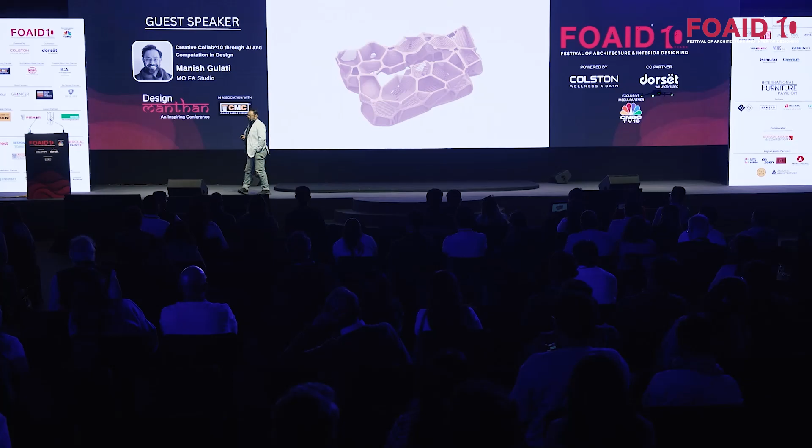For us, design is more deep-rooted than just what your intent is. In a lot of these cases, we don't know what our intent is.

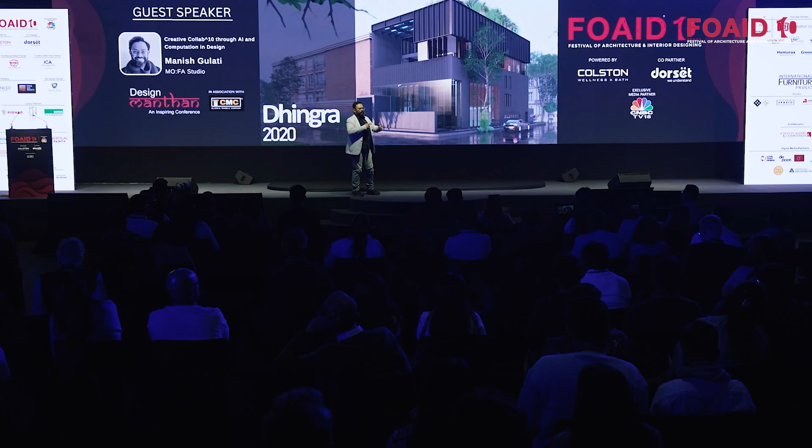I had a thought to start off by saying there was a time when we used to use CAD, then BIM. I'm going to go in reverse with this, looking at what we are doing today versus what we have done in the last 20 years. So it's a sort of reverse chronology of the same thing.

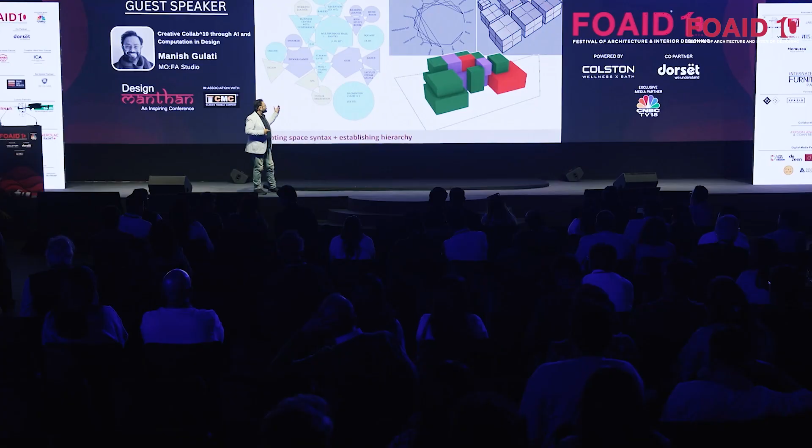How one function is connected to the other function, and how these parent-child relationships work. How one function is important and connected to another, and that sort of gives us this interrelationship diagram.

I invite Manish Gulati, the founding partner of MO:FA Studio.

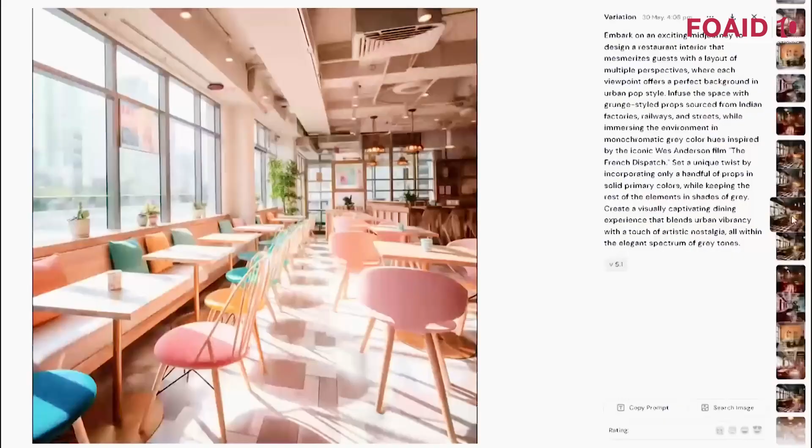So yes, those 3,000 images were generated in 12.5 minutes on Midjourney.

Today I'm here to not talk about the projects. I'm from this firm called MO:FA Studio. We've been around for 20 years now.

And this is what I'm here to talk about. More than just doing the projects, it's about this factor: the known and the unknown. In most design projects, it's always the known factor with the architect's mind. It's one person, a team, collaboration. You have an idea, you already know what you're going to build. And from there on, you know the results. You have a sketch, a line, and from there you start building and resolving it.

Our whole journey in the last few years has been working with designs where we don't know anything. That's where words like inclusiveness, democratization of the design process, and using machines come in. It's like having people on your team, but for us, even the machines are as important, where we are feeding in the data and using simulations.

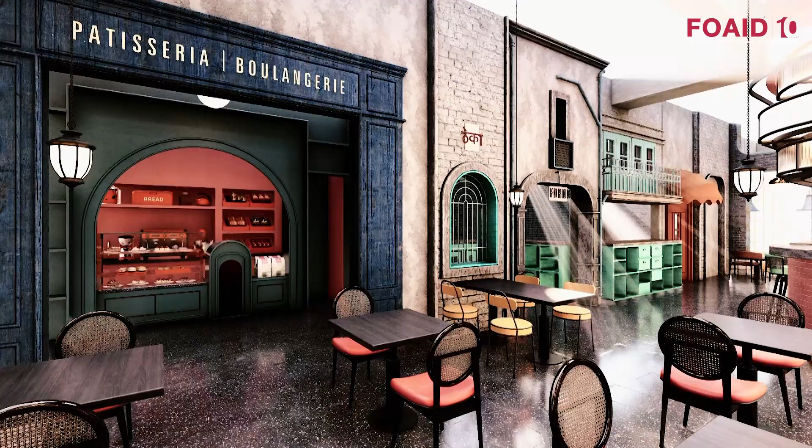Most of these results ended up talking about the color schemes, the perfect colors of Wes Anderson, and this surrealistic combination of Paris and Delhi. These images started to appear with various prompts, and they became the inspiration for us to work out the interior space, and various colors and textures, a perfect combination of what AI could do with you.

Going further, that's just a space coming up.

We're working on another project, a 3D printed clubhouse. It's a public building we're doing in Bangalore, one of the first 3D printed buildings in the country, where we used three factors. We used AI to visualize the spaces for us. At the same time, we have not drawn a single line or a plan.

What we've done instead is develop these visuals simultaneously while the design is being developed. So there's no plan, no line, no sort of intent that has been drawn.

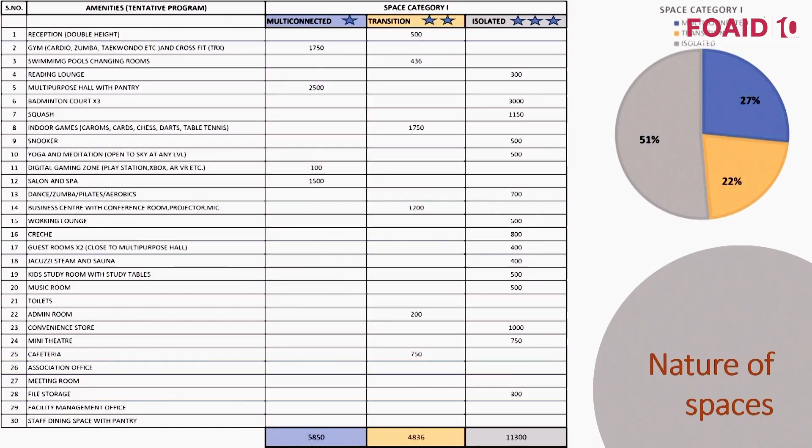What we call generative design: we've taken the area and fed it into a plugin called Termite Nest. It's a simple relationship of a parent and a child relationship.

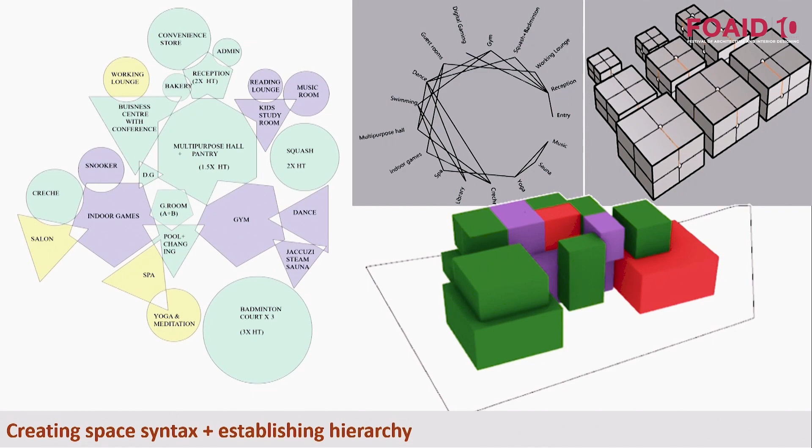How one function is connected to the other, and how these parent-child relationships work, how one function is important and connected to another, gives us this interrelationship diagram.

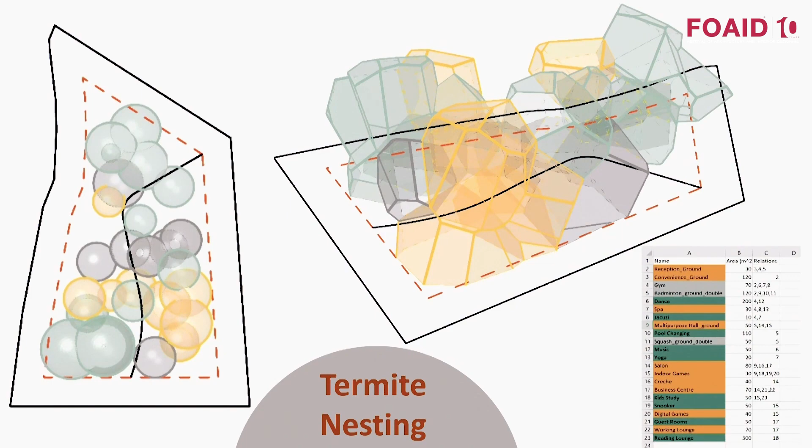What we've done is fed that into Excel, and using termite nesting, every time the data changes on the Excel sheet, the configuration of the building changes. This is a sort of iteration we've been working with as it comes together.

And the third part of this is that this project is going to be 3D printed, coming together in the form of layers.

For us, design is more deep-rooted than just what your intent is. We don't know, in a lot of these cases, what our intent is.

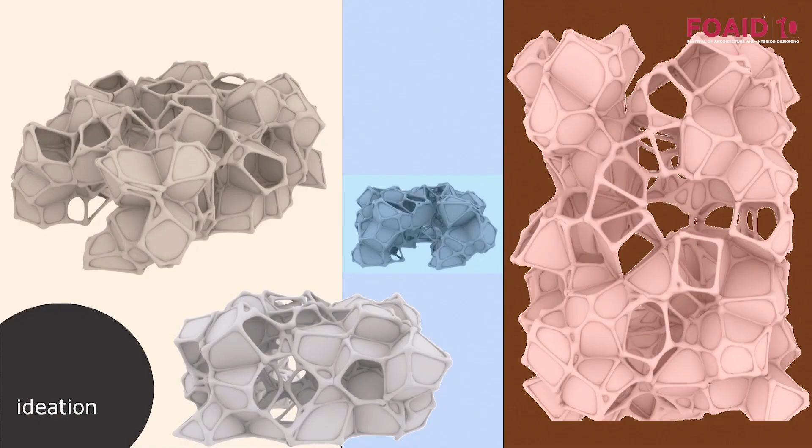And I'm a lover of technology. I'm somebody who's grown up with technology. This is the space which is coming up. And this whole presentation is going in reverse.

I had a thought first to start off with saying that there was a time when we used to use CAD, we used to use BIM. But I'm going to go in reverse with this entire thing, showing what we are doing today versus what we have done in the last 20 years. So it's a sort of reverse chronology of the same thing.

A residence that we started during COVID, a completely emergent design. The client had a very simple brief. They wanted to create a very large subterranean space, a basement which would receive a lot of natural sunlight, enough so that we could grow an entire garden or trees inside it.

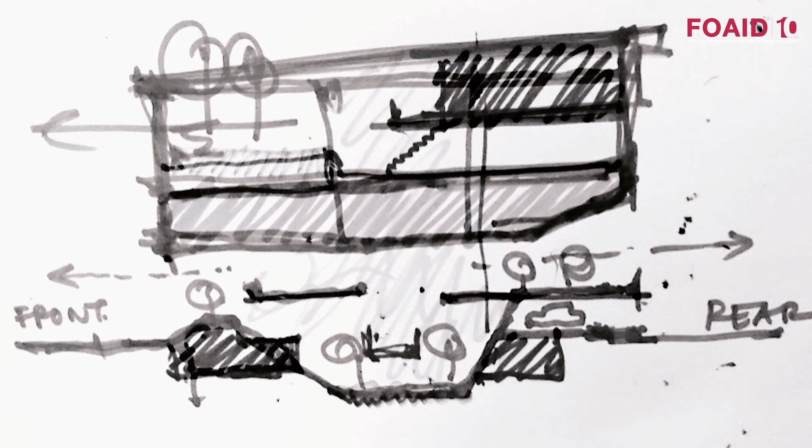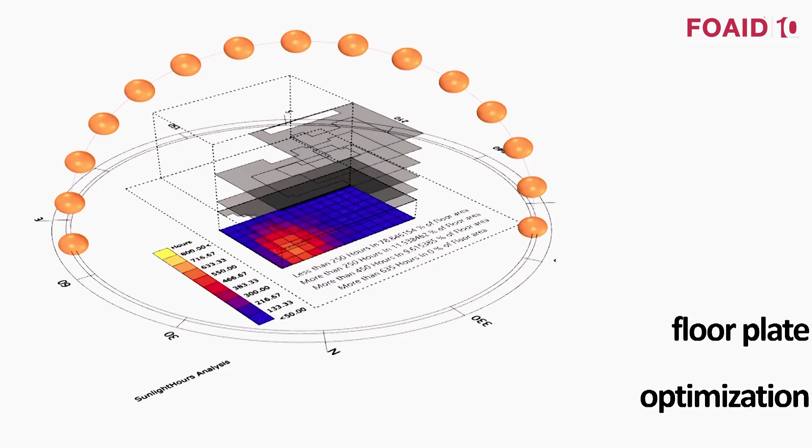Rather than going with a standard way of drawing a plan, we fed that data into an algorithm, and we got more than 27,000 iterations within 12 hours. These 27,000 iterations were then refed into the computer with the functional layouts. And what we got was multiple floor plates, multiple floor plans, each one adhering to one condition, that the basement would achieve more than 60 to 70% of natural sunlight.

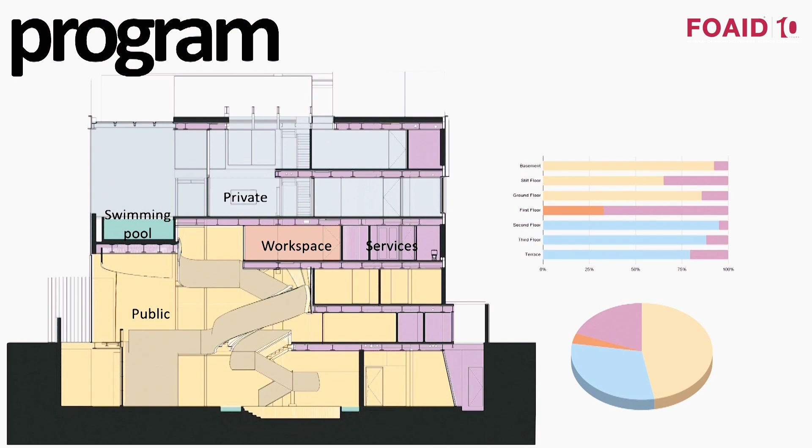Based on this, the plan sort of started emerging, and we got a section where you see a reverse section. The basement and the lower floors are almost 40 to 50 feet high, whereas the house sort of becomes more dense as you go up.

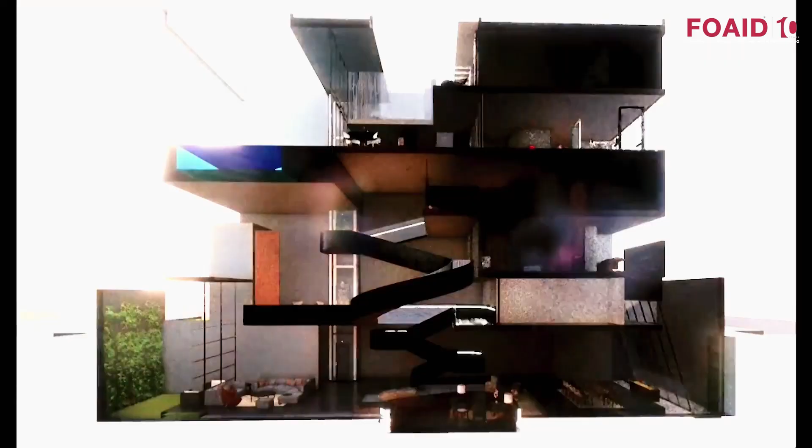That's a sunlight study to understand, and even today, when I stand there, we did the simulation of the predictions of a particular date and particular time in a particular season. The sun shadows, the sunlight, and the lux levels were exactly how we simulated them.

Another project of the emergent design where we did a small installation, no plans were made. We wanted to create a landscape using shipping pallets. And here, rather than coming up with an idea of how this whole installation would be, we just had an Excel sheet of XY coordinates.

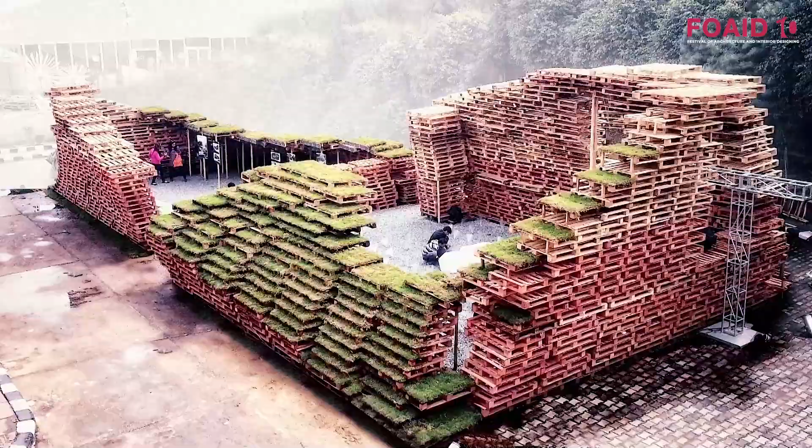Those XY coordinates were used to just stack these pallets to create these hillocks, which are more of the nostalgic memories of my childhood, going to the ruins in Delhi, to Lodi Gardens, where you got these sort of ruins with grass growing over it, and as kids, you go up, you have your Sunday picnics.

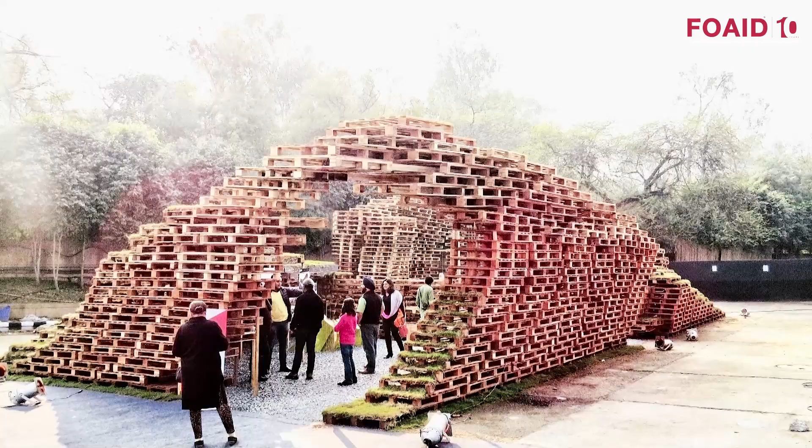So this was more to kind of understand and come up with something where you're not using the standard way of making a drawing or making a model or doing anything.

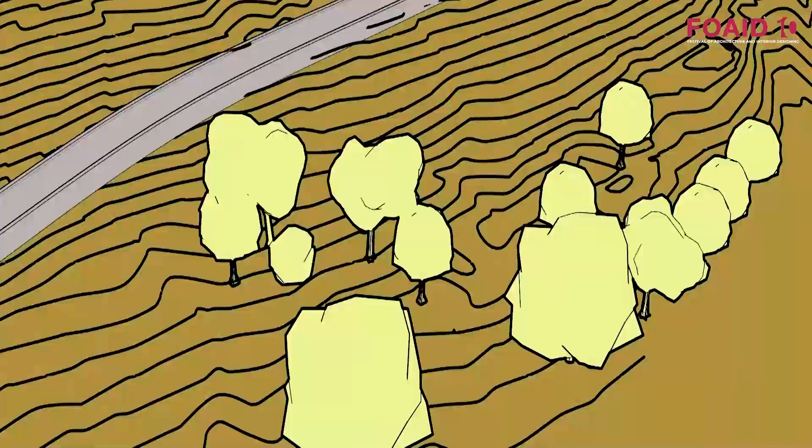It's one of the largest projects that we did, again using a similar kind of approach, where there's an existing contour, and we did the terrain mapping for that contour so that the natural water flow doesn't stop. We divided the entire contour into a grid of cubes, and these cubes, wherever they appeared on whichever part of the land, this takes us back to the villages in Himachal, where every house is sitting on its respective contour.

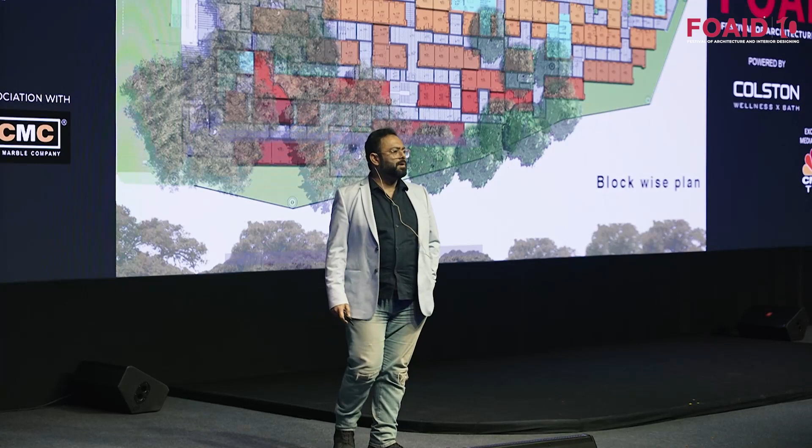Rather than leveling the land, flattening the land, we used it to our own advantage, and a plan sort of emerged from this whole technique of having an equal distribution of internal streets as well as residential spaces which moved at various levels, creating these wonderful internal streets with existing trees. We used the existing trees to our advantage, and we moved all these units within that.

I'm going to skip because there's lots to show.

Now, since this is reverse in chronology, something that we have been dabbling with for the last 15 years is CNC file-to-factory production of houses. I use the term production of architecture because over the years, 90% of our projects are not constructed using RCC on site, because we want to reduce the carbon footprint, we want to reduce the pollution, we want to reduce all of that. So most of the projects now are factory produced and brought to the site.

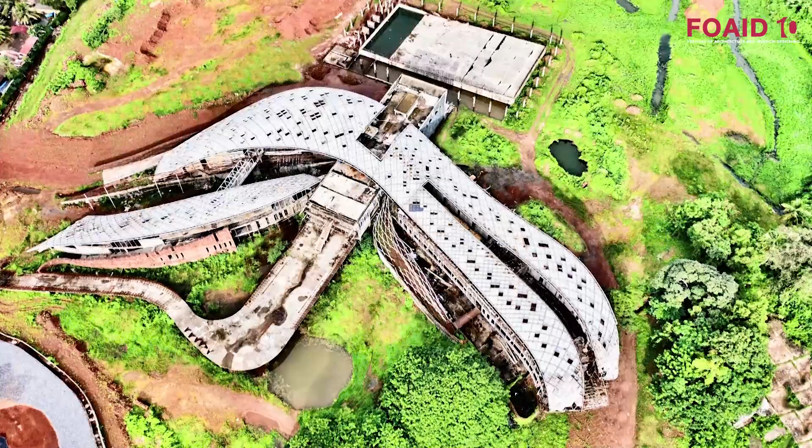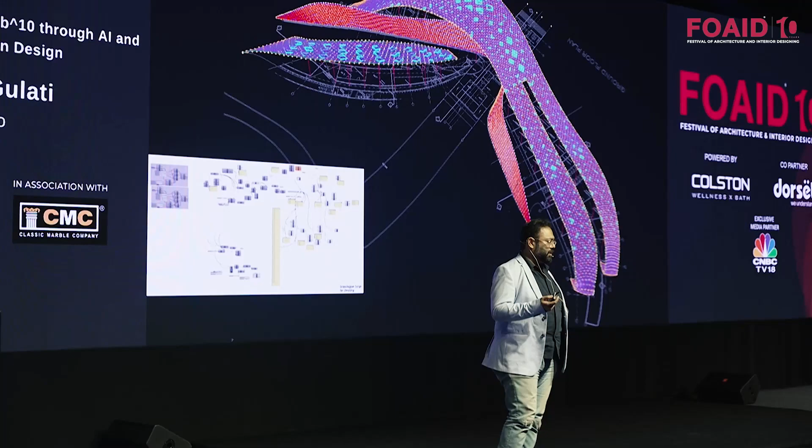One of the largest projects we've done in Goa, about 45,000 square feet of roof space, where the entire module, every part of the roof, individual modules were done using topological optimization. We use the roof in order to reduce steel. It's a government project done at L1 costs, so one of the most reasonably done projects in the country. We did the fabrication analysis.

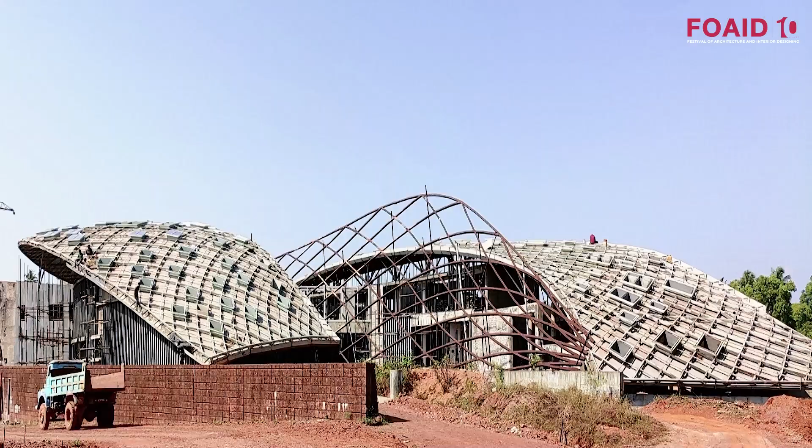We worked out the entire roof, which is a doubly curved roof inspired from the waves of the sea, in the form of how it can be manufactured in the simplest possible manner. The drawings were automated within the office. More than 5,000 drawings were done within a span of 15 days, all automated. The accurate data retrieval, down to the core, meant these pipes could be individually welded within the factories to get a roof which is within the tolerance of plus minus 3 mm.

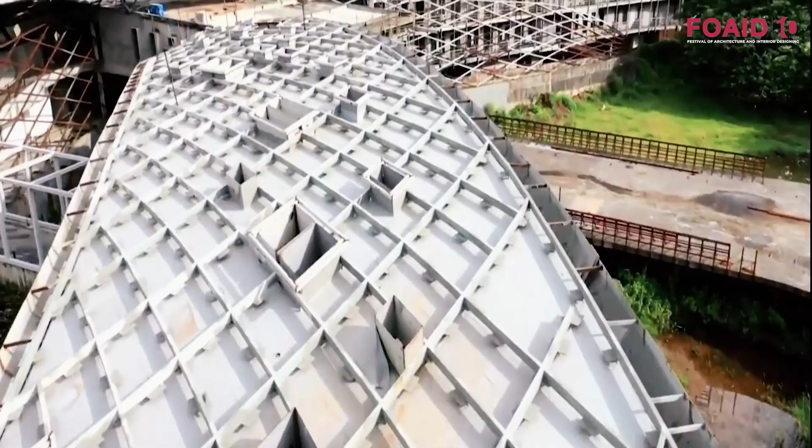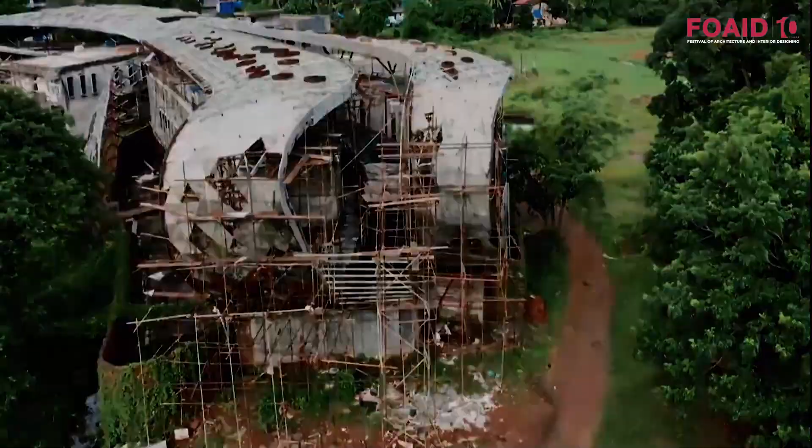A very highly accurately done roof at that scale at extremely low costs. It shows you the complexity of the roof, the skylights, where everything was pre-analyzed, pre-simulated, right from the lux levels to the rainwater flows, to the water flows and how it would react to the wind and the sunlight.

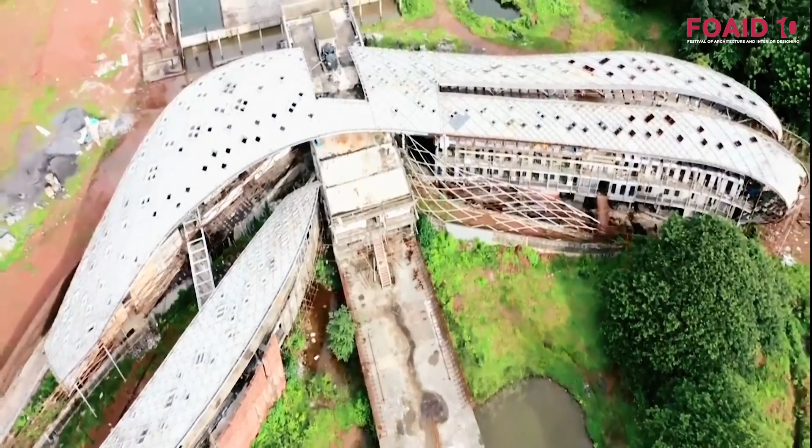The roofing material itself is one of the cheapest color-coated metal sheets, which was used using an origamic technique. We programmed the entire thing within the office as a simple cut-fold system, and all these individual roof panels mount themselves on the complex roof, thereby forming a seamless surface that represents what we were wanting to intend. That's the almost completed project.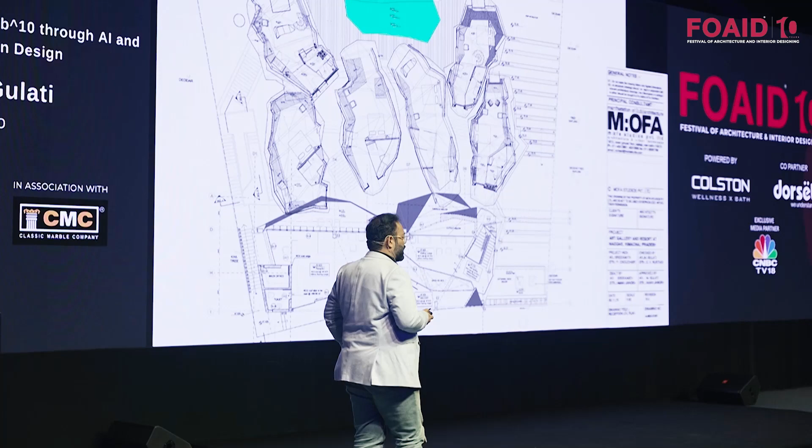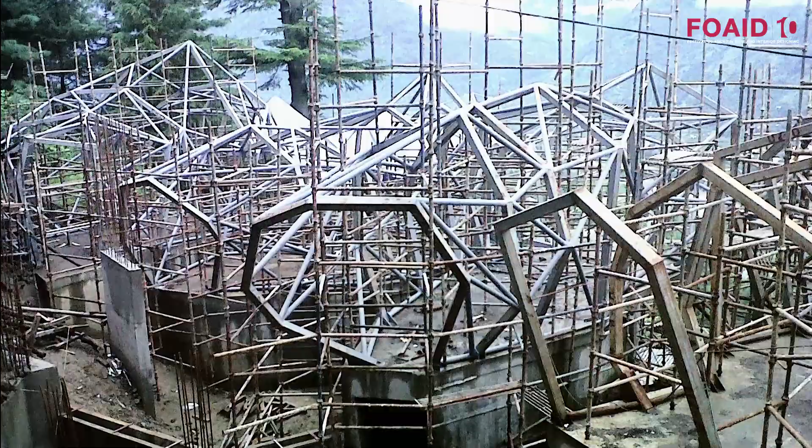Almost inspired from the anthill architecture. Each of these frames, pre-planned, pre-cut, produced in the factory, brought to the site. The site was extremely difficult to work with. It snows almost 3 months a year, and the construction time is only 6 months. So in that extreme condition, most of these frames, most of the structure was made here. And then this is the photograph of the completed project.

Some of the views of the pods, the interior spaces - the precision at which a structure like this could be made in difficult conditions of Manali was only possible by using the automated techniques of CNC and file-to-factory production.

This was the first residence we did in 2006, where we had used a similar kind of a system where the walls were not built using the traditional materials, but were made using plywood slices, covered with ferrocement, and we got a very organic shape.

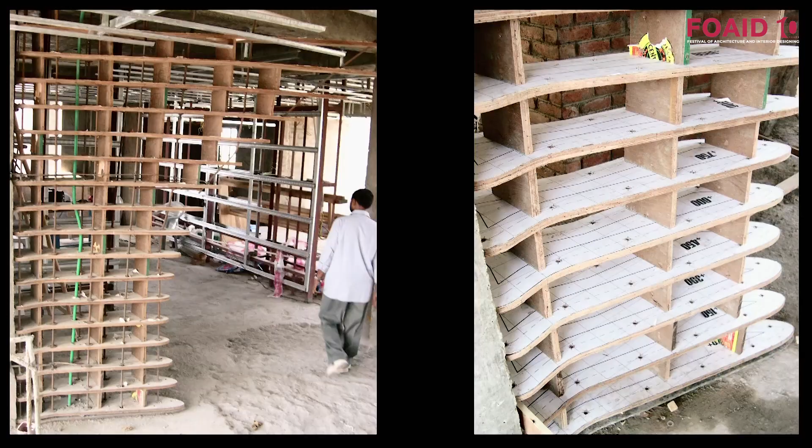So this is a very experimental project. In fact, every project of ours is an experiment. It's a study for us to understand. So the last 20 years of MOFA is more like a study in itself - we're an institution in itself to learn and understand what the next level is going to be.

Coming back to a standard factory-produced prefabricated architecture, which is something that we are pushing.

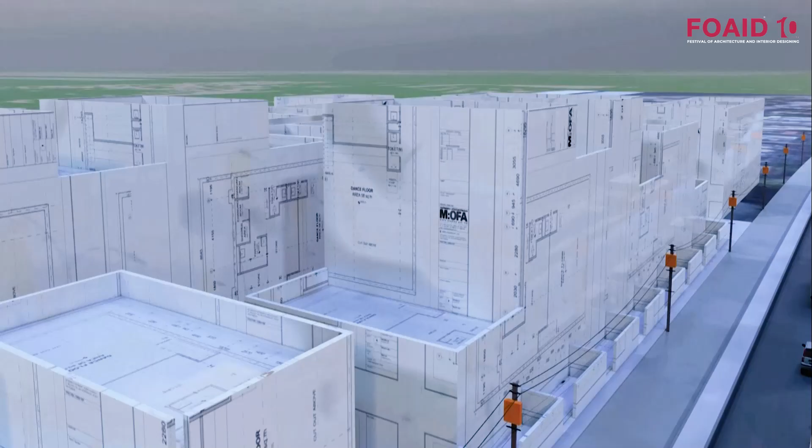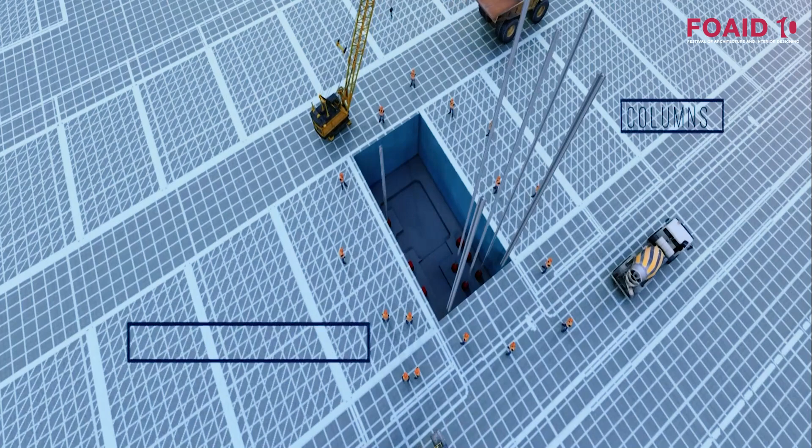A conceptual video for one of the houses that we are doing in Paschim Vihar. This was shown to the client in order for him to understand the whole construction process, where only the foundations were done on site, rest the entire structure comes like a Lego block, pieces coming from the factory assembled on site, including the precast walls.

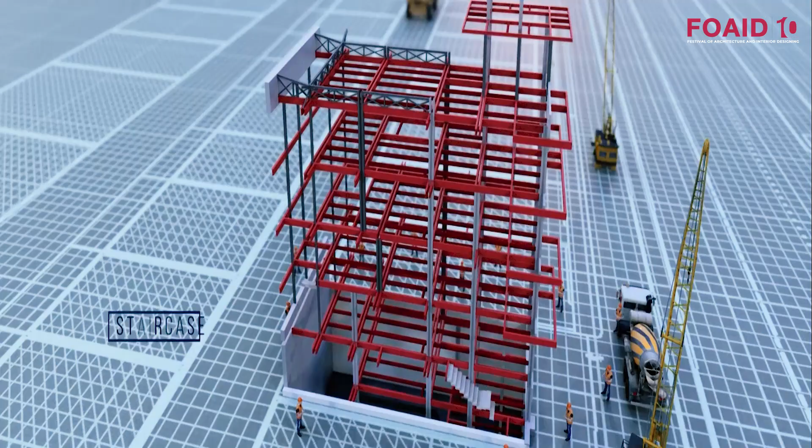So the idea for us is to look into the future, and in order to automate the process of design and construction, making it more democratic, more inclusive, we are not averse to using the machines. We love to work with the machines.

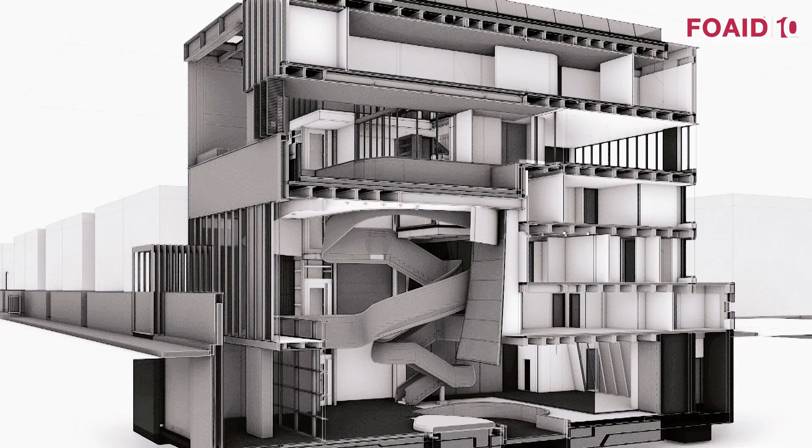Going to another house in Bangalore. The entire house is prefabricated. Even the complex forms, the complex roofs are all completely worked out and done. The immersive house that you saw in Ishwarnagar, in Delhi, is completely done in steel again.

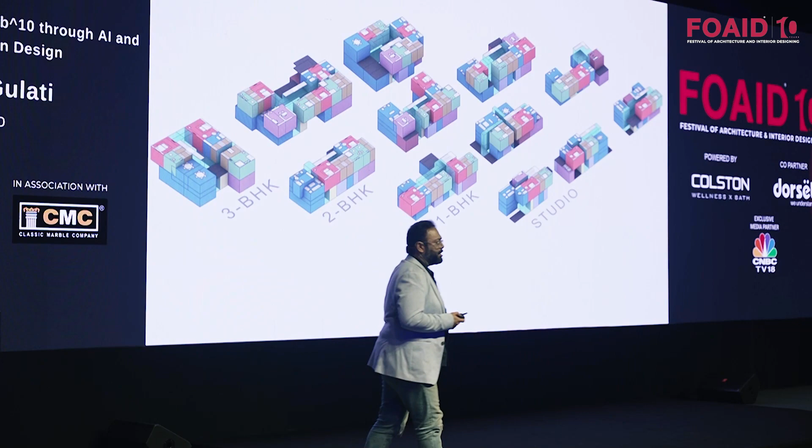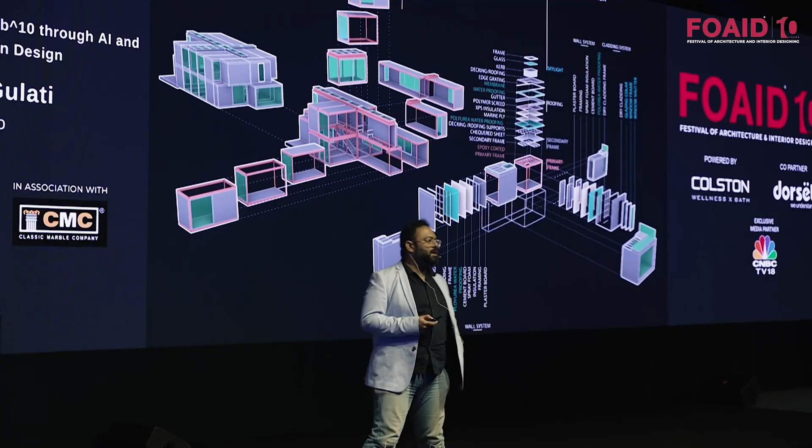Coming to the point that we have designed houses and we're marketing these houses now, where the entire unit is built into the factory, not as a kit of parts, but as modules of almost 8 feet by 40 feet. Those modules can be assembled on site in a matter of 2 to 3 months maximum. So much so that you could literally, in the future, order a house on Amazon, use the app, design it, put together, make the whole process so democratic that ultimately you do not need architects like us.

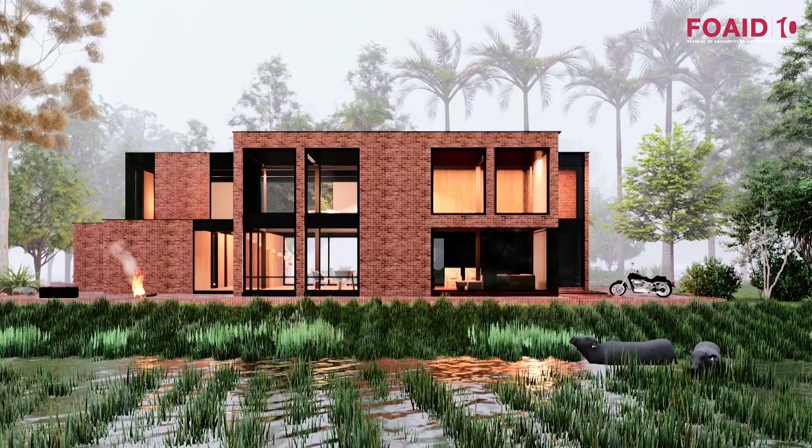That's a complete house. Another project we're doing in Goa using shipping containers.

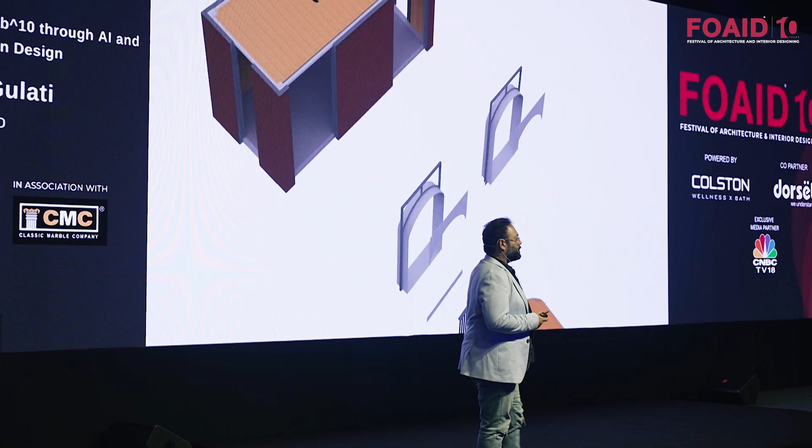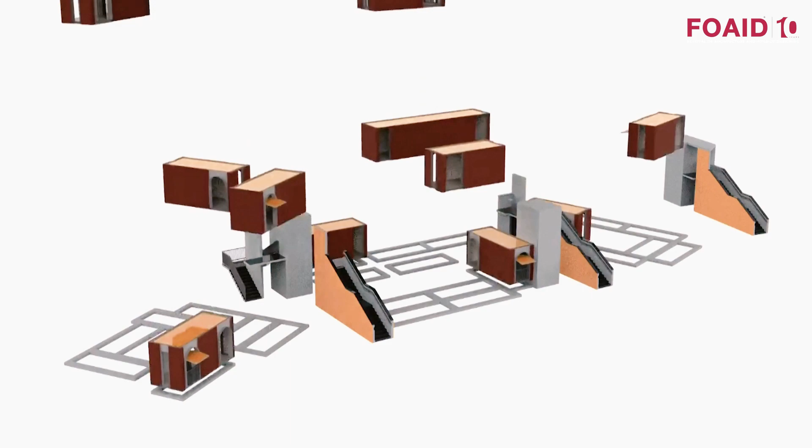We're recycling these 250 shipping containers, prefabricating them off the site, about 20 kilometers away, as a kit of parts where every window, every railing has been turned into an inventory, and that inventory is pre-worked out with various modules which come together on a site in Goa, reducing the carbon footprint and the pressure on the land by 90%. Lightweight foundations, and everything above that is factory produced. So much so that tomorrow, if they decide to remove the project, the land is completely free and given back to its original shape the way it was.

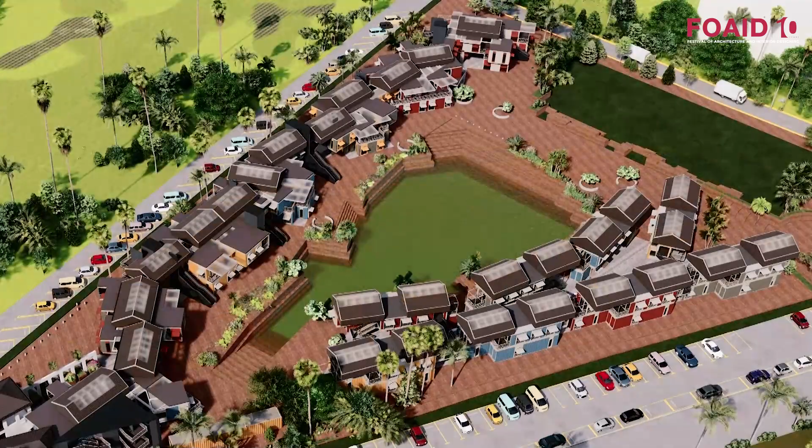That's the view of the Goa Bazaar, or Goa Haat, which is a crafts bazaar in Goa, designed completely using shipping containers and prefabricated elements.

This brings me to a point — apart from building the architecture or the physical look, a lot of times I've been questioned that it's a very form-based thing. Is parametric design only form-based? No, it's not. Parametricism means using parameters to simulate certain variables to get an intended result.

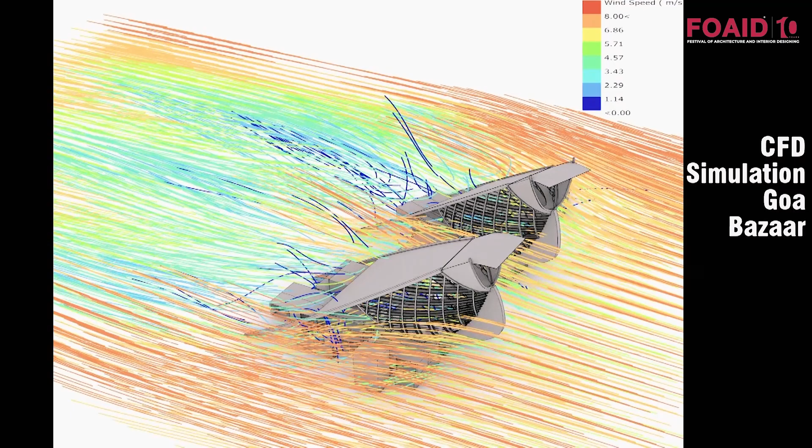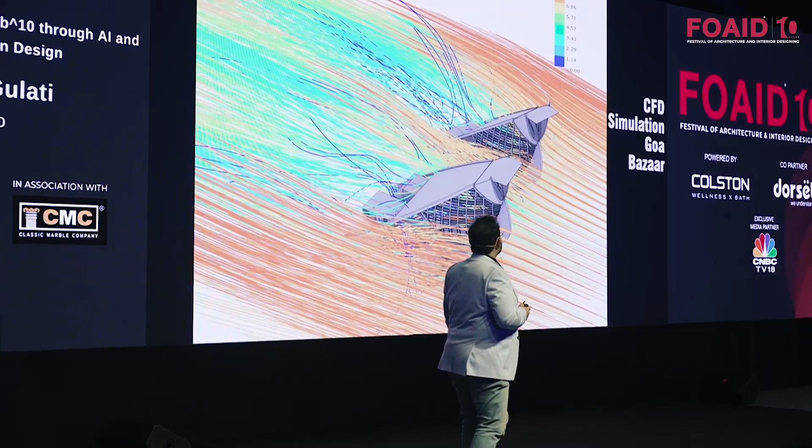So here we use data which is seamlessly available — cloud computing, a word very commonly used in finance markets and various places to do predictions. Here we do predictions for buildings, like a CFD simulation of wind for these structures in Goa, where we are harnessing the sea winds above 20 meters to bring down the microclimate of the land at ground level. These are high-level CFD simulations where we fed in the actual wind data from the meteorological department and understood how the wind can be harnessed for our benefit.

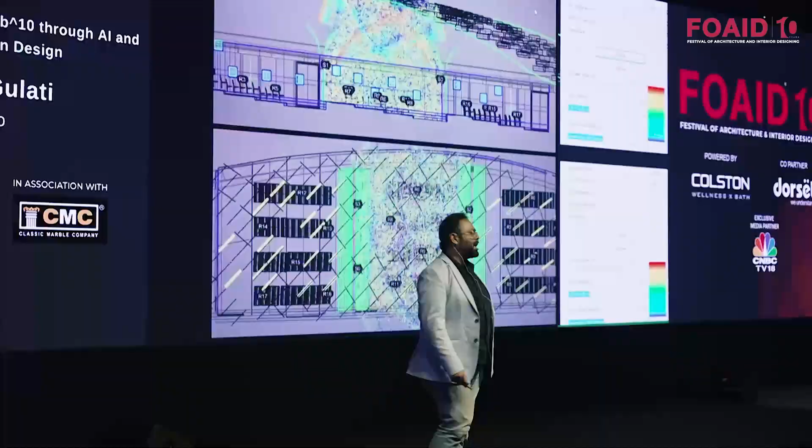Acoustic simulations for the project in Goa, where the classrooms are all open. So these simulations helped us control the sound spillage from one classroom to another and design a system using acoustic panels, so that without using any walls or partitions in between, we could contain the sound from one space to another.

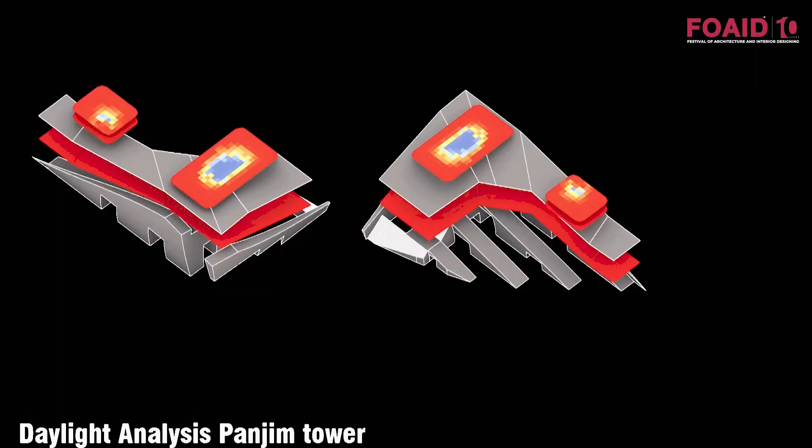For another project in Goa, the daylight analysis versus the solar heat gain analysis helped us understand what kind of facade, what kind of glass, what kind of nature of the outer skin for the building should be.

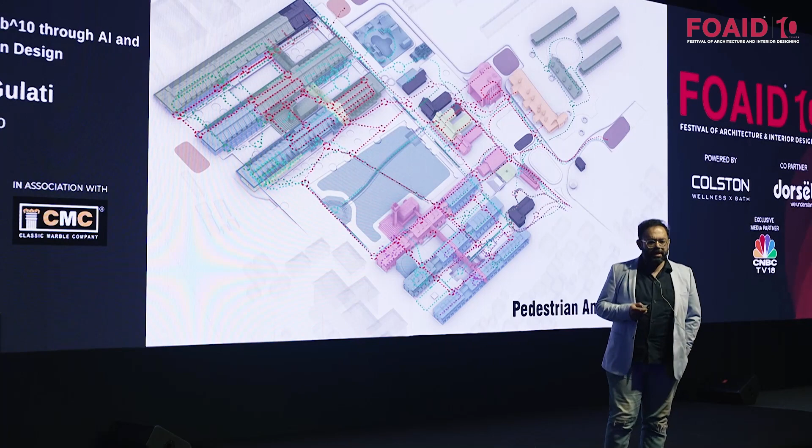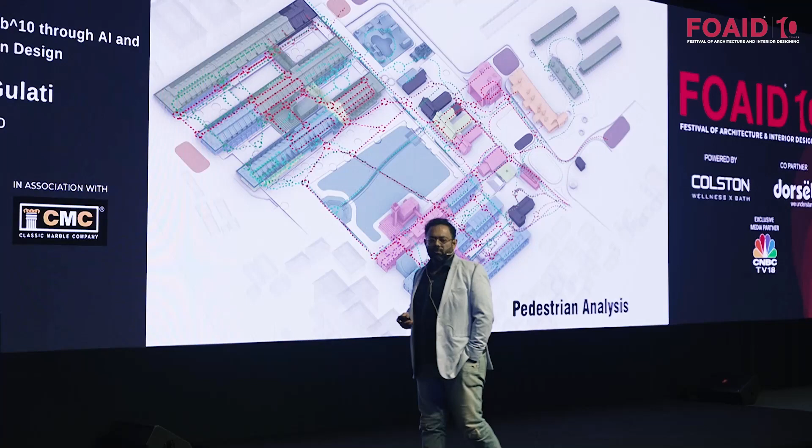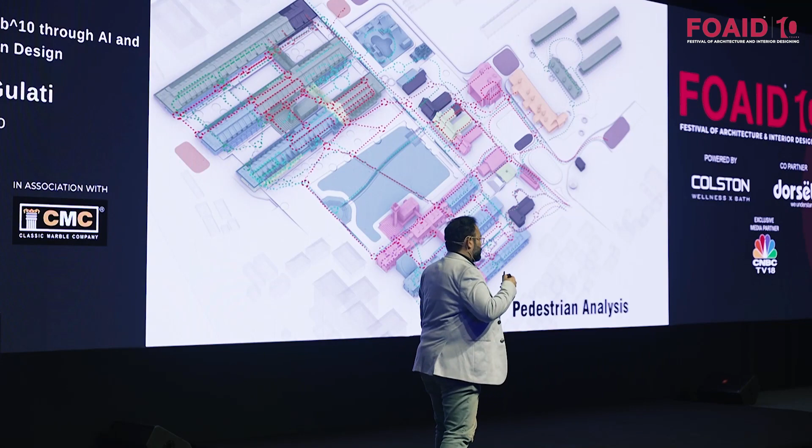Or pedestrian analysis — for a project in Kashmir, an adaptive reuse public building, we needed to understand how the spaces would be used by, let's say, 5,000 or 10,000 people coming into this public space every day. We simulated the movement of those people using avatars to understand which were the most frequented spots within the whole project, so we could allocate functions like cafeterias versus more private functions.

And these, or simply a water flow analysis — these analyses helped us, on the same site, which is flood-affected, design the entire landscape by understanding the real water flow of the rainfall.

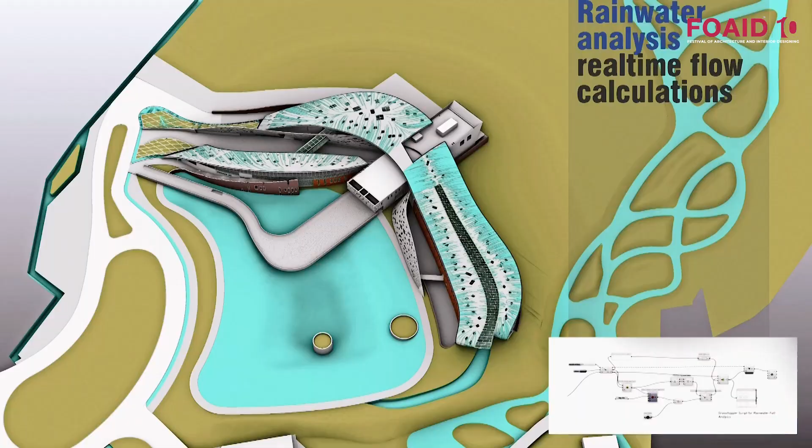And in the end, of course, there's poetry — not only the machines. We have designed projects which also create immersive art using the machine and the human mind. An installation done about four years ago, called Room of Illusion, a performative space with multiple mirrors that reflect and give you a sense of infinity. The whole thing was simulated much before we actually went on ground.

It's the interaction between humans and machines that interests me at a personal level. And MOFA, over the years, has grown to understand and make this more into work in progress, rather than looking at a project as completed — taking a photograph, shooting it, doing the whole song and dance about a finished project. A project for us is never completed. It should never be. It's always a work in progress.

Every project — more than 160 projects designed in the firm over the last 20 years — each one is a learning from one to another. And I think we've just started. Thank you.